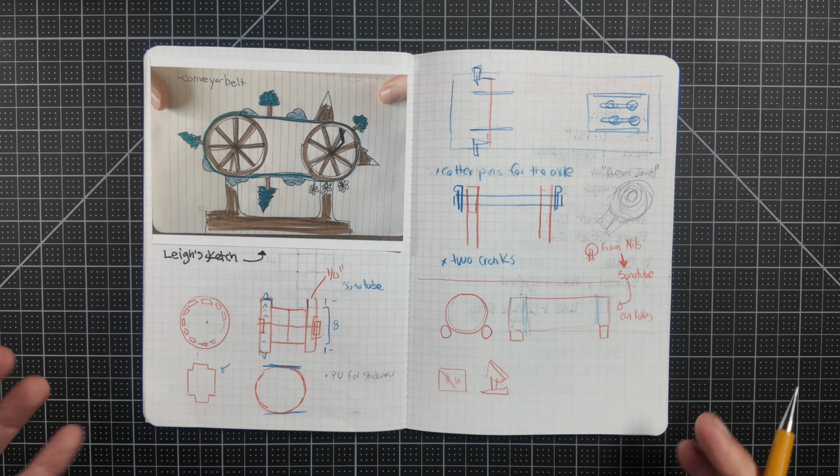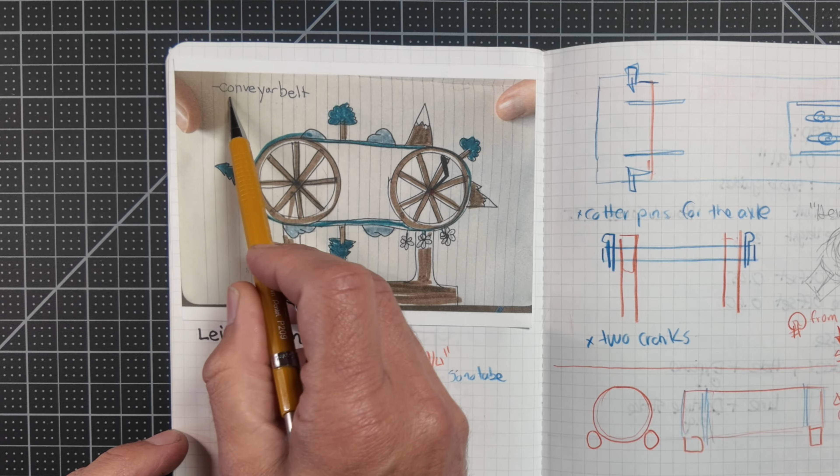So my friends reached out to me with an idea, and they sent me this sketch, which I really loved. I think it really captures the whole thing, and it's really charming. So the idea is that they do puppet shows, and they wanted a background that would move. And so the idea is that there would be two wheels, and there would be a conveyor belt in between them that would rotate, creating the illusion of the scenery going by.

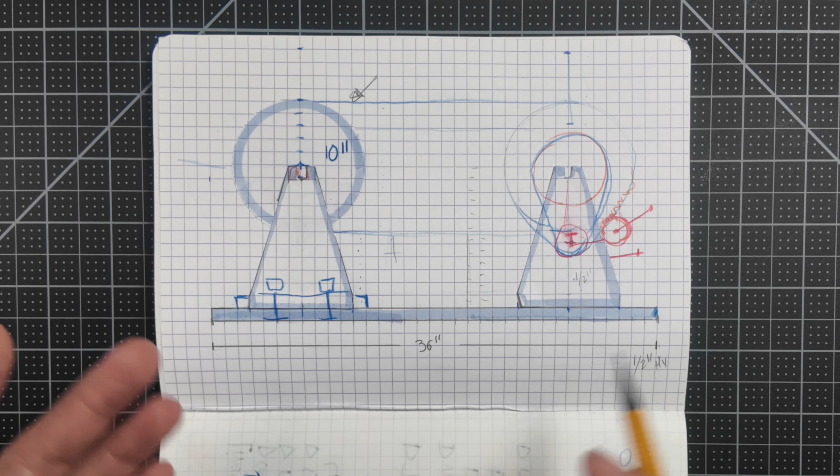So we met to refine the details, and this is the sketch that we ended up with. This is in inches, and so we ended up with a total length of 36 inches, so about 3 feet. And the diameter of these wheels would be 10 inches, with some space underneath to allow for all the scenery to go by of about 6 inches.

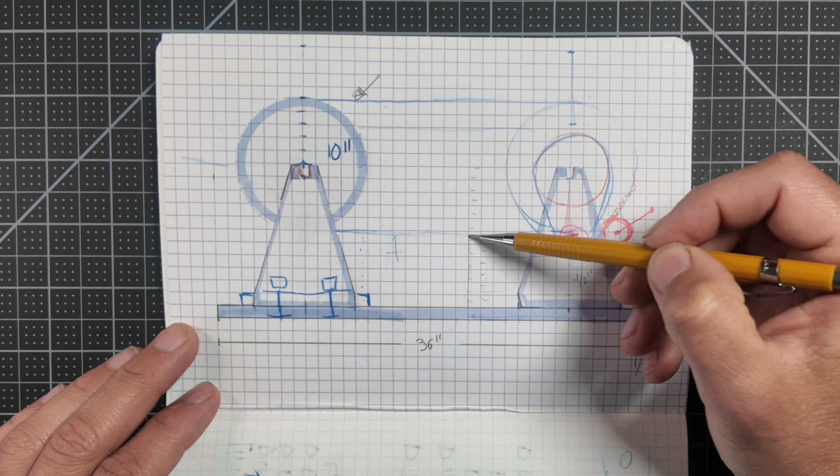And then I sketched out some ideas for how the crank would operate. I thought it would be interesting to have a belt moving these things, so you'll see that later in the video. But my first step was to make the wheels. To get the geometry for the wheels, I used this polygon box Cuttle template. It's meant for making small boxes that have a few sides, but I kind of misused it in a way to make the wheels that I needed.

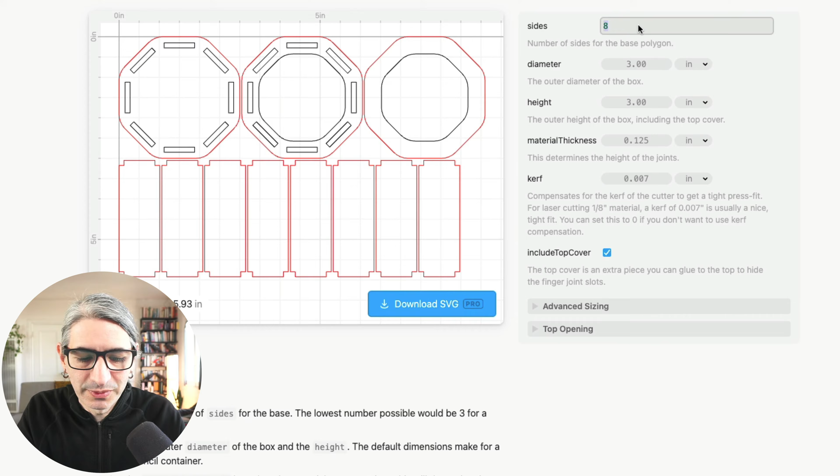So I started by changing the number of sides to 24, so that kind of approximates a circle. Then of course I changed the diameter to 10.25 inches and the total height of the box to 4.8 inches, which allows me to accommodate those 2 inches for the Velcro belt. And of course the material thickness for the 1/4 inch plywood that I was using.

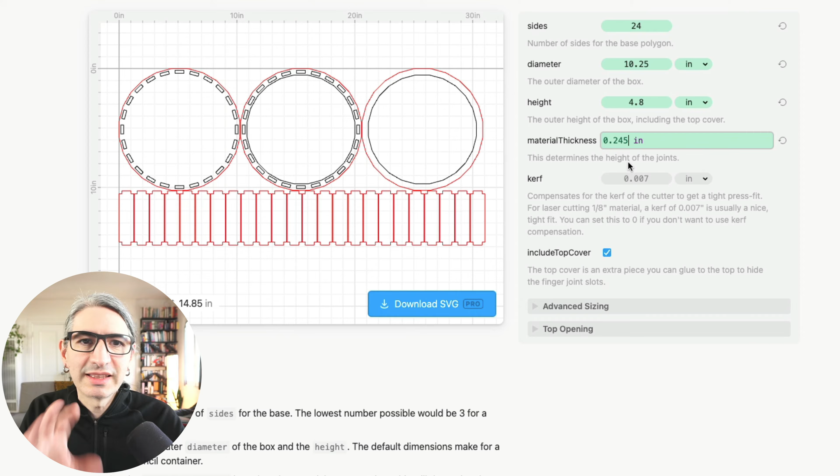And then I added some holes in the middle. This is what it looks like. So you can see the center hole for my axle, and then a few holes to attach some things onto those big wheels. So after this, it was off to the laser cutter.

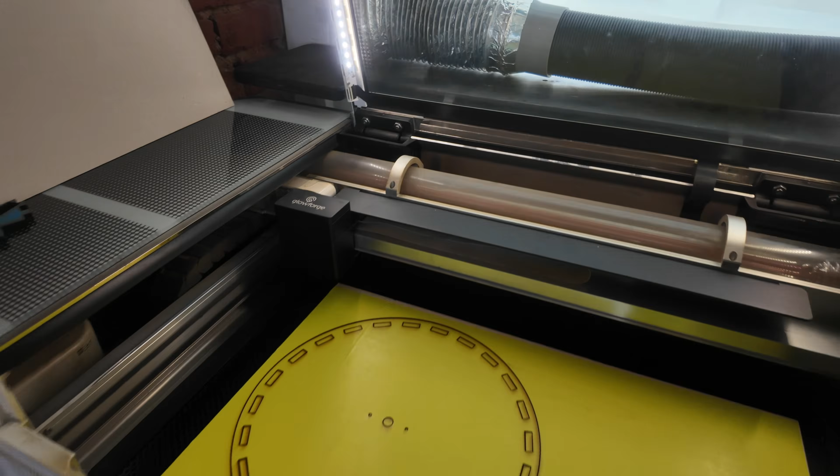This is some 6mm, about a 1/4 inch birch plywood, but the yellow stuff you see here is just the masking tape. These are the parts for one of the wheels, 2 faces, and then all the slats for the perimeter. My first job was to remove all of the masking tape. Laser cutting can leave some scorch marks and burnt edges, and the role of the masking tape is to help you end up with cleaner parts.

So these holes are to use these bearing blocks, and I want to mount them using this tiny number 6 screw. But then I want more of the screw to bite into it, so that's what these little reinforcers are for. So I'm gonna glue the reinforcer here, so I have twice the thickness for the screw to bite on. So I'm just gonna do a little bit of wood glue here to hold it in place. So I should clamp it and align it.

Now I want to place all the slats around the perimeter, but I'm going to apply some wood glue as I go. After all the slats, it was time to glue the second face, and I had to add glue to all the little sections a little bit faster this time, so I could join it in a single step. These are all the sections that are going to be in contact at the end, and the inside faces as well, and the outside faces.

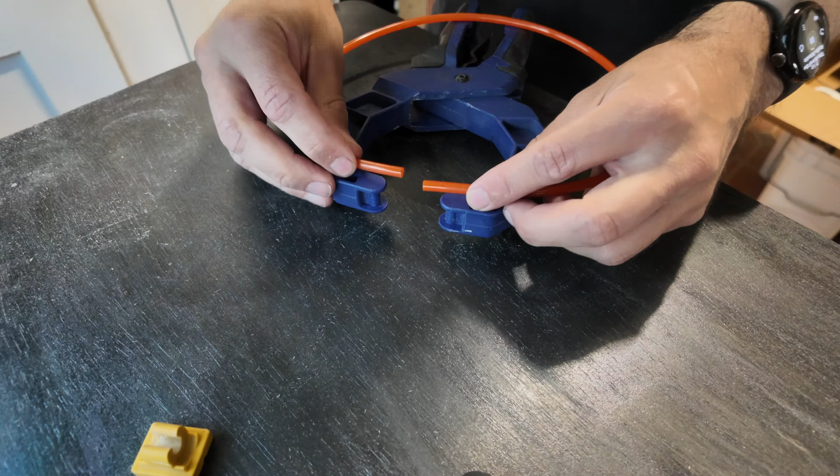This is also my first time joining this type of belt, so I improvised a jig with this clamp by holding the two ends with some zip ties. So I had an easy way to bring them back into alignment after melting the ends with the lighter. And it worked pretty well.

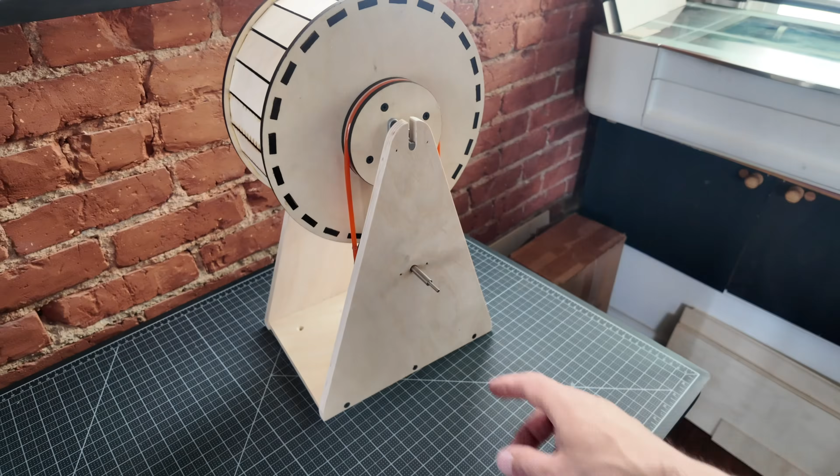I let it sit there for about 20 minutes, and when I came back, it was very strong. The only thing I had to do was trim the excess that squeezed out with the heat. I mounted it onto my assembly, and the action was super smooth. So now onto the handle.

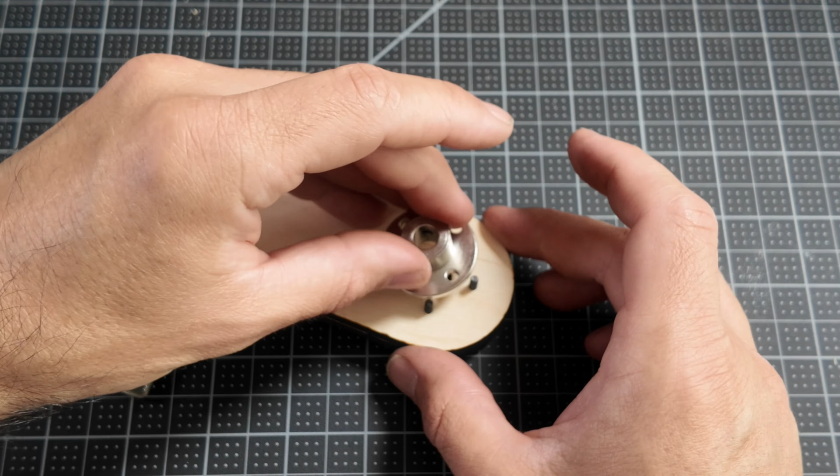The crank arm for the handle was made in two pieces that got glued together and then aligned with these 4 screws that match the pattern for that silver flange. And for this kind of mechanical device that is going to be handled a lot, I like using these nylon locking nuts.

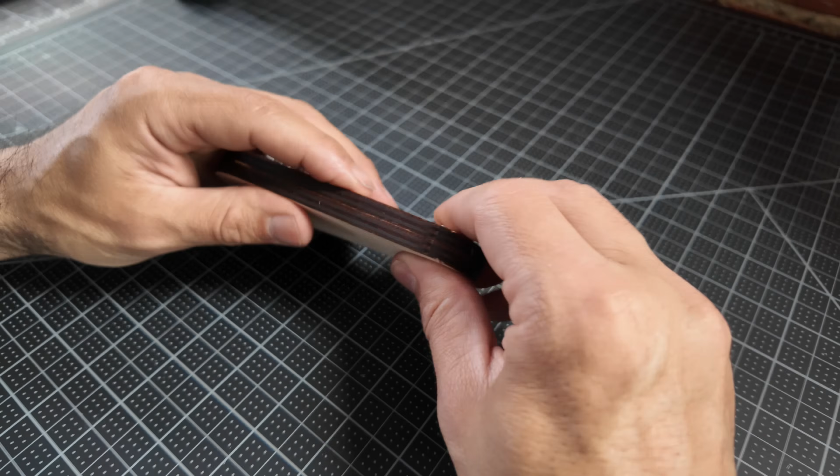Here you can see a similar locking nut that gets embedded into the crank arm, and it's the one that I'm going to use to attach the bolt that becomes the axle for the handle itself.

And this part goes onto the pulley axle, and it grabs onto that axle with these set screws. And you can see it in action here. It felt surprisingly smooth. But before I can test it, I needed a base for both wheels.

This one is made out of 3/4 inch plywood. I decided on the location, then I measured the distance from the edge so I could trace a line across the whole thing, so I could align both wheels.

I placed a single screw that I could use as a pivot point, and then I wiggled my base in compliance with the line I traced before securing it in place. Now I could place my 4-inch wide Velcro that would be the conveyor belt between the two wheels, so I could test it. I was very excited at this point.

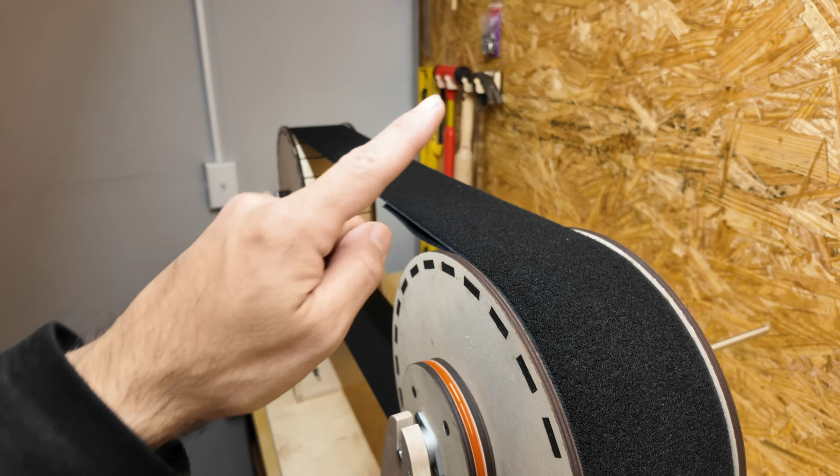I attached it with just another little piece of the hook part of the Velcro, and that held on pretty well. And this was my first time testing the whole contraption. It works as intended, but I made a big mistake. Let me show you. So we got the 4-inch belt right here, and it's traveling well in between the two wheels. So that's nice.

And then my idea is that the pulley would lower the handle position, and then if I wanted to, I could change the size of this pulley to change the ratio in between these two. Right now it's just like a 1-to-1. But the huge mistake that I made is that the goal is to have things that are attached right here, you know, like other pieces that would travel along and then turn around and then come back. But by having the handle down here, I put this axle right here, and that axle just interrupts things.

I think what I'm gonna have to do is move this handle back to here, even though it's not as pretty, but it's the simpler solution. So I had to reconfigure a bunch of things, including the spacing between the forks and the location of these bearing blocks. But I think I got back on track. So I mounted the handle onto the top axle, and it worked really well in this configuration. And I still can't believe I didn't see the problems with that pulley.

Anyway, at this point, I could finalize the length of my conveyor belt. So I marked the location where I could sew some of the hook part of the Velcro on the back, so the conveyor belt can attach to itself. And the nice thing about this is that you can detach it, but it's also a way to control how tight the conveyor belt is between the two wheels.